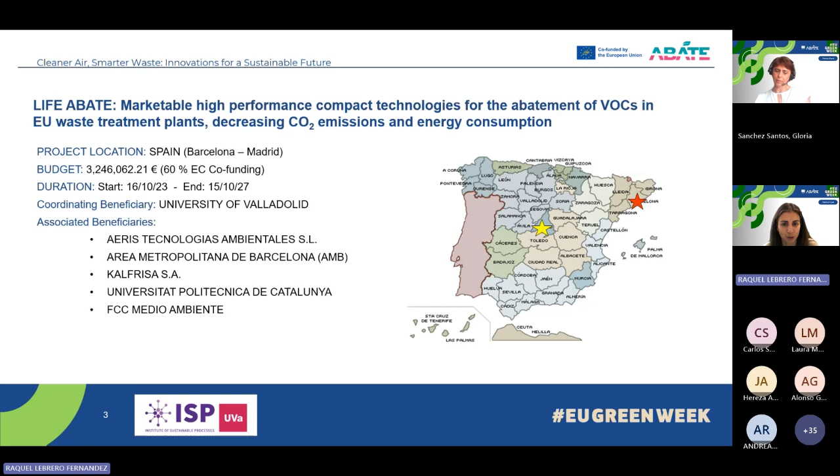But what was the main problematic or the main challenge that triggered the development of this project? Well, what we know is that nearly 700 waste treatment plants, or more specifically mechanical biological treatment plants that we have right now across Europe, are releasing over 4 million tons of volatile organic compounds annually.

And these gaseous emissions are very tricky for treatment because they have very special or distinctive characteristics. They are characterized by really high airflow rates and trace level concentrations of a broad spectrum of VOC families. So basically, we have huge volumes of air streams with a huge number of volatile organic compounds with different characteristics and at very low concentrations.

So the treatment of these emissions has always been very challenging. Right now, current technologies that are used in MBT plants for the elimination, for the removal of these VOCs, are either physicochemical, such as, for example, thermal oxidizers, or they can be also biological, such as biofilters.

But these technologies, these solutions are usually high cost, they consume a lot of energy, and they have also a high carbon dioxide footprint. And if we look at the biological technologies, at the biofilters, they usually are challenged because they require a lot of space. They have a high footprint.

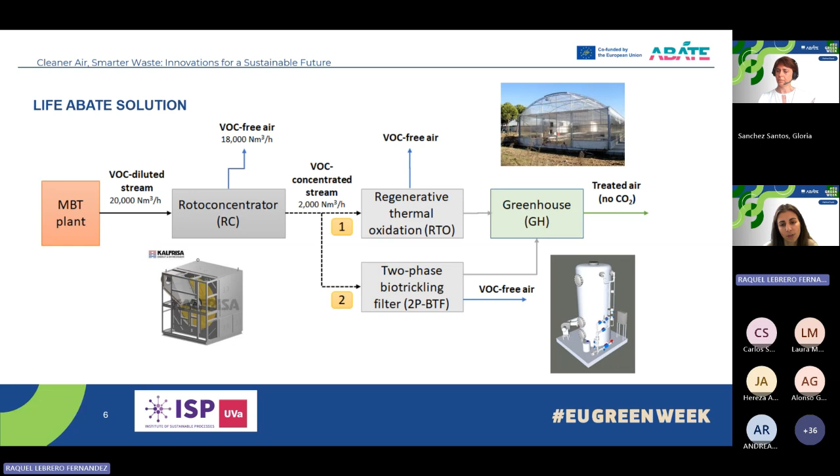As I said, we have finalized all the detail engineering. We are finalizing also the construction of the demo plant that will be started in September in Ecoparc 3. But I want to show you also some preliminary results that I think are very interesting, that were used as the baseline for the design of the technology of this demo plant. We performed some sampling campaigns for the identification and quantification of volatile organic compounds in the Ecoparc 3, in this MBT treatment plant.

These two sampling campaigns use different sampling methods and analytical methods, but I just want to focus on the main results. As you can see here from the first campaign, what we saw is that isobutane, butane, and ethanol were the main VOCs contributing to the concentration in the indoor air of Ecoparc 3. And the ones that contributed most to the odor were D-limonene and ethanol.

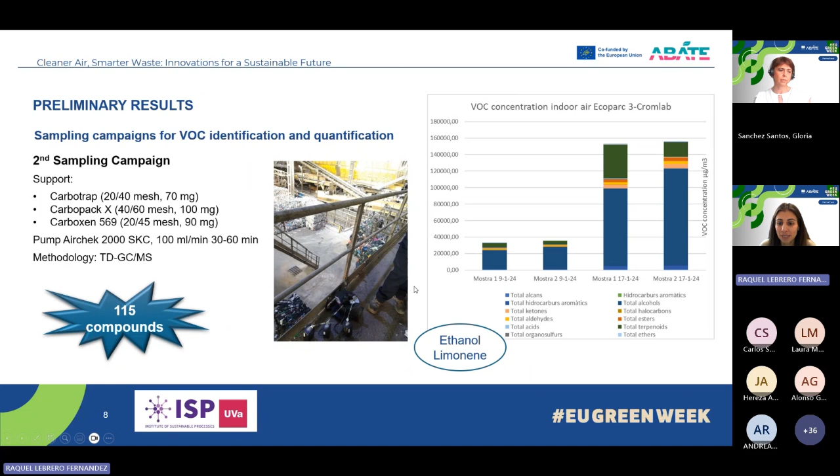And in the second sampling campaign, where we used a more complex support for sampling and analytical TD-GCMS for identification and quantification, we could identify 115 compounds. So just to take into account that we are targeting the removal of most of them in our solution. The ones that had the highest concentration were ethanol and limonene. And here you have the ones that contributed the most to odor, which were acetaldehyde, ethyl butyrate, and butanoic acid.

So of course, this poses a big challenge for the technology, for the project, because as I said, we detected a lot of different compounds from many different families, and we had to prioritize. So our prioritization was based first on removing those VOCs with greatest health risk, those that were most abundant in our samplings, those compounds whose concentration exceeded the odor threshold, and then we had to also prioritize different compounds over others.

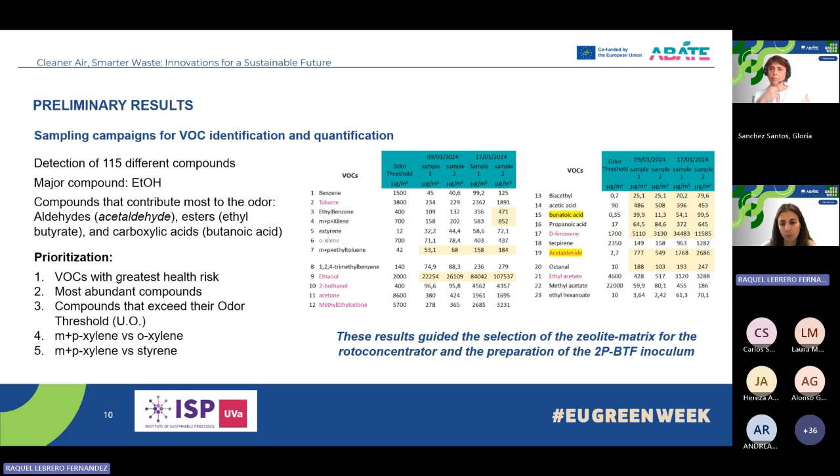And this selection of these results were the ones that guided the selection of the zeolite matrix for the rotoconcentrator. And also, we use these results for the preparation of the inoculum of the two-phase biotrickling filter.

And for about 200 days, the system was operating with removal efficiencies over 90% in the biotrickling filter for all the compounds. So we had very good results at the laboratory scale, and these ones we're expecting to translate into this demo scale.

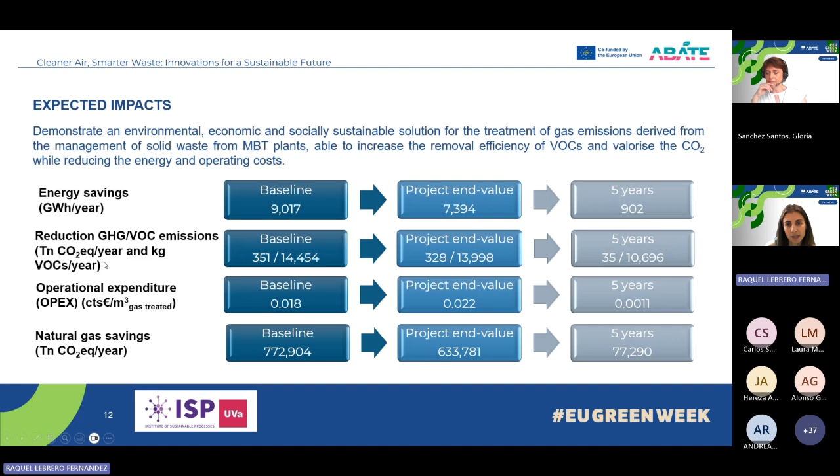Well, here you have the expected impacts. These were some numbers that we did at the beginning of the project, but we have our partner from Polytechnic University of Catalonia that will present these impacts later on. So you will hear more about the energy savings, reduction of greenhouse gases, VOCs, OPEX, and natural gas savings. So this will be further treated later.

And just to end the presentation, our project is clearly aligned with the goals of the European Green Deal 2030 Climate and Energy Framework, the European Union's carbon neutrality, and other European Union directives for minimizing volatile organic compounds emissions and other events from MBT plants. And also we are expecting to include our technology as the best available technologies in the BREF document for waste treatment, and hopefully to consider it in the development of European Union policies.

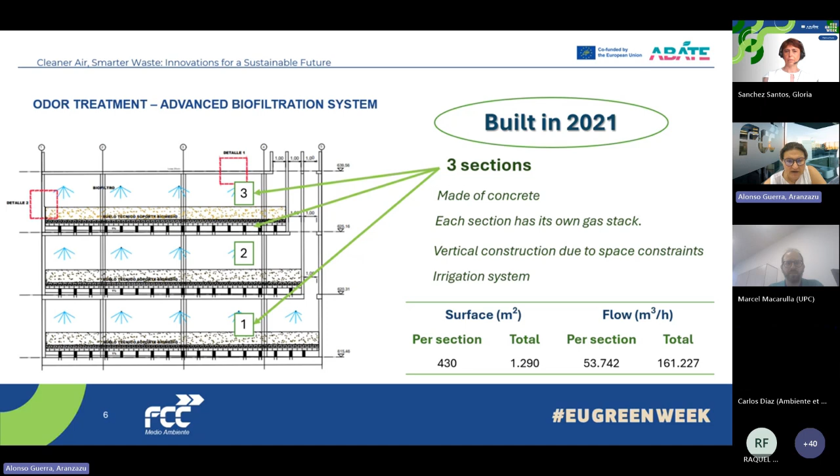The stream of air is extracted from the most problematic areas of the plant, and first is humidified in a scrubber to ensure that the air arrives in optimal humidity conditions and free of dust or particles that could inhibit the biological reaction inside the biofilter.

The scrubber is a tank filled with a plastic material where the polluted air is countercurrently washed with water. We use water that is the permeate reuse from the reverse osmosis in the leachate treatment plant. Once pre-humidified, this air is injected into the biofilter and distributed in the 3 sections.

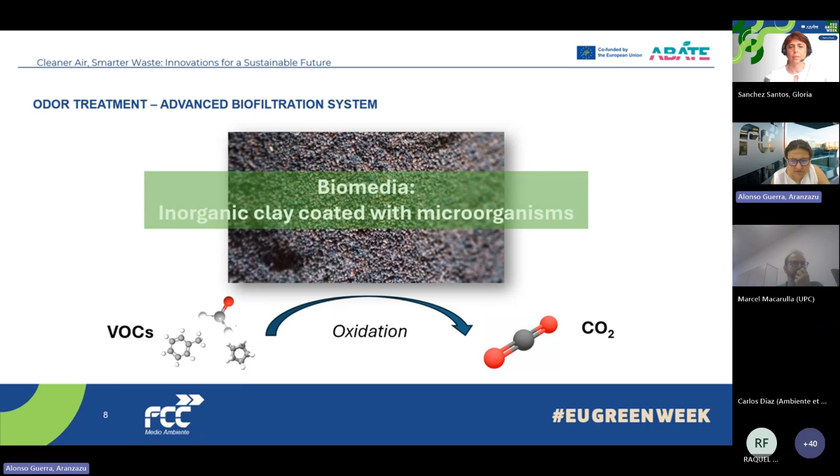The biomedia is an inorganic clay covered with specific microorganisms that oxidize the gases present in this polluted air, transforming them into CO2. This biomedia is the key for this advanced and innovative deodorization technology. And this is the biofilter that we use now in the plant.

One of these is the LIFE ABATE project, which aims to reduce VOC and other emissions, and also reduce the operating cost of the deodorization system, as Raquel has explained very well. In addition, it will transfer this CO2 produced to a greenhouse for agriculture use.

The ABATE solution to be installed at a biomethanization plant in Las Dehesas will treat a flow rate of 20,000 normal cubic meters per hour at 35 degrees, loaded with VOCs. First, the stream will be passed through a particle filter.

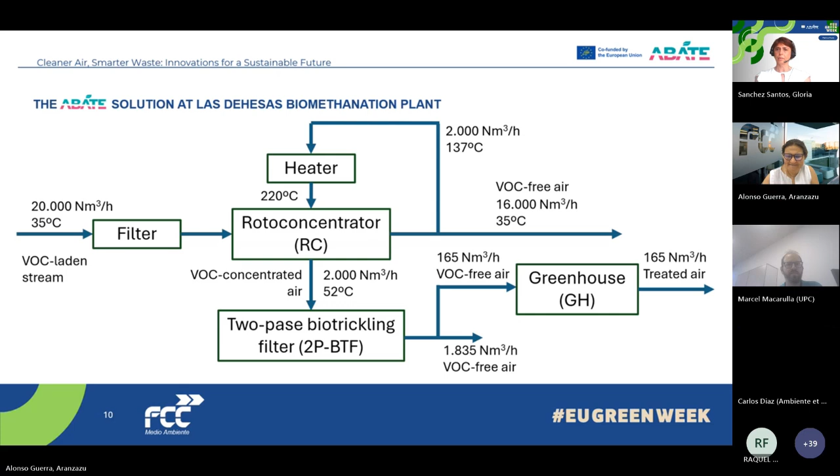The rotary concentrator is the first equipment of great importance in this process, and is where the concentration of the VOC stream will take place. The most important advantage of concentrating this stream before cleaning is reduction in the volume of air to be treated, decreasing the size of this equipment, and therefore the investment cost and energy consumption of the treatment is also reduced.

Also, the system is more compact and saves space. The equipment is easier for installation in the plant and dismantling if it was necessary to move to another place. Greater system efficiency is expected, as concentrating the VOC stream allows the system to operate closer to its optimal load range, and this will increase the removal efficiency, we hope.

The concentrated air will be treated in the biotrickling, a biological VOC treatment system. Here, the polluted air passes through a bed of inorganic material irrigated with a solution rich in nutrients and microorganisms. When the airstream passes through the bed, the pollutants dissolve in the liquid recirculated inside it. The microorganisms present in the biomedia oxidize the contaminants into non-toxic compounds such as CO2.

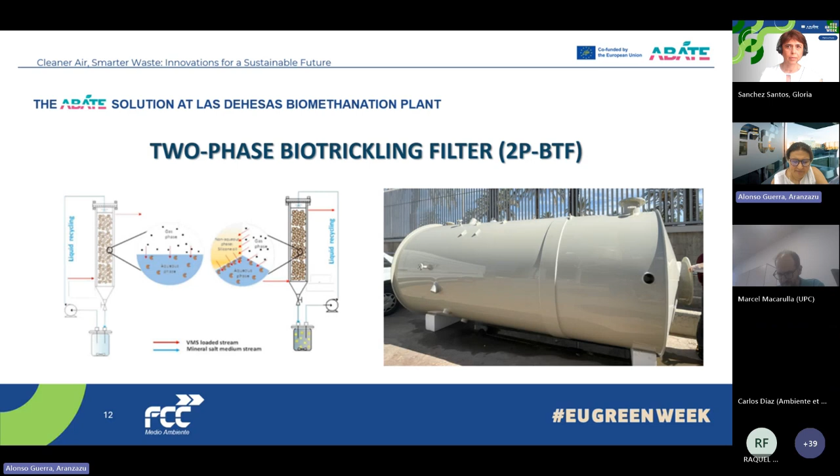But the ABATE solution has several strengths worth highlighting. Operating parameters, pH, nutrients, contaminants, and temperature are better controlled in biotrickling, we hope. Biotrickling supports higher loads of contaminants, such as VOC and acid gases. It is more stable, does not dry out or clog easily, and performs very well when load variability is high.

After biotrickling, the airstream rich in CO2 will be used in the greenhouse agriculture, and this also reduces the concentration of greenhouse gas emissions to the atmosphere.

Current operation in our biofilter, Arantxa, one minute, sorry, okay, one minute, okay.

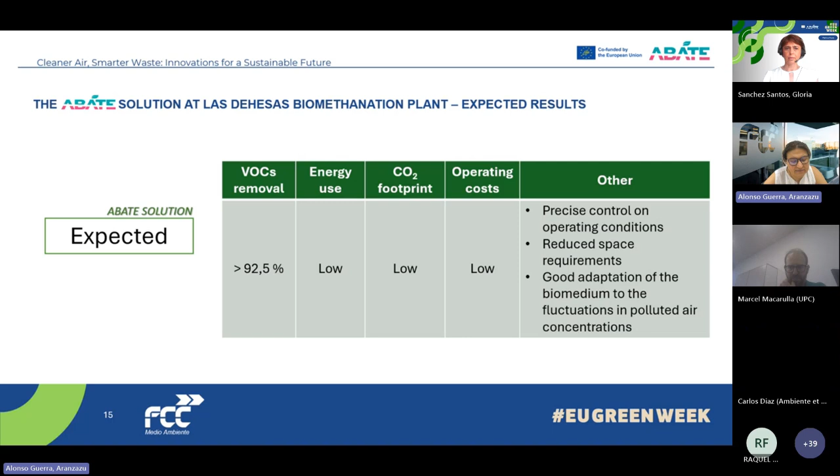What we expect in the ABATE solution is a similar VOC removal efficiency, around 92, an important reduction in energy consumption and carbon footprint, lower operating costs, and resolving some of the operational problems that we have now in the biofilter.

The preliminary LCA analysis suggests a high possibility of a reduction in energy consumption due to the rotary concentrator, although it considers the reduction in footprint in square meters, and an annual saving of around 87 in operating costs. Compared to the current equipment, it's a very significant difference, and a compact system requires less maintenance.

Now it is necessary to validate this technology and obtain experimental results when the prototype is put into operation in Madrid. The design of the equipment and the preliminary LCA analysis suggests that the ABATE solution at Las Dehesas biomethanization plant could be viable and competitive for replication in other mechanical and biological treatment plants for municipal solid waste. In summary, the solution proposed by ABATE offers big advantages for deodorization.

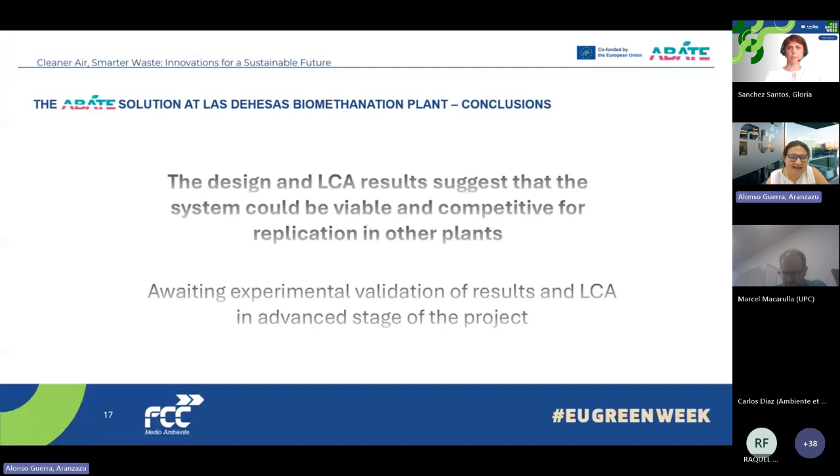One, reduced space occupation and lower footprint. Two, long lifespan of the packing material of the two-phase biotrickling filter compared to a conventional biofilter. Also significant energy savings, minimal operation costs, a totally automated system, good adaptation of the biomass to fluctuations in polluted gas concentration, and environmentally friendly technology.

Thank you very much for your attention. I'm sure this will be a great project, and we will obtain good results from this prototype. Thank you very much. Thank you, Arantxa.

Now we continue inside the LIFE ABATE consortium with Marcel Macarulla. He is Associate Professor at the Polytechnic University of Catalonia, belonging to the Construction Research and Innovation Group named GRIC, expert in the integration of greenhouses with buildings of various typologies to investigate environmental assessment and circularity synergies, with a focus on energy optimization, indoor air comfort, and LCA modeling. He is head of RG Lab, a living lab that integrates a greenhouse into a building's ventilation system to explore real case indoor air modeling and energy efficiency.

Thank you, Gloria, for your introduction. Sorry for this small issue. As Gloria mentioned, I am Marcel Macarulla, and my presentation is Expected Impact of LIFE ABATE: Reductions of Emissions, Energy Efficiency, and Cost Savings. This is the content of my presentation.

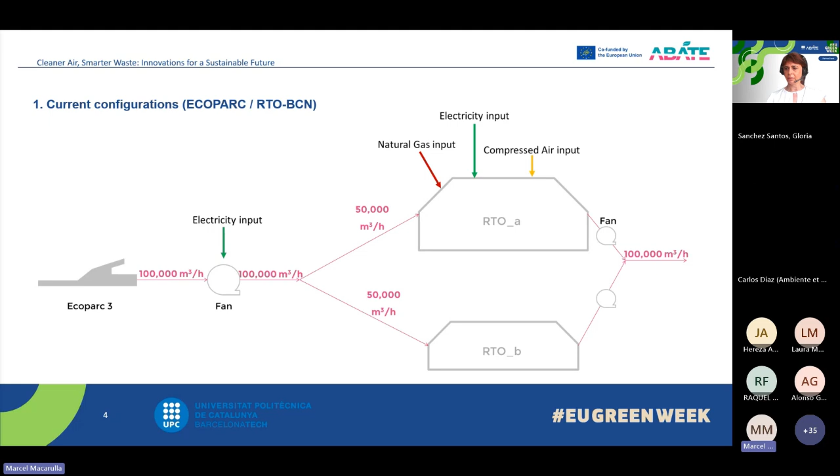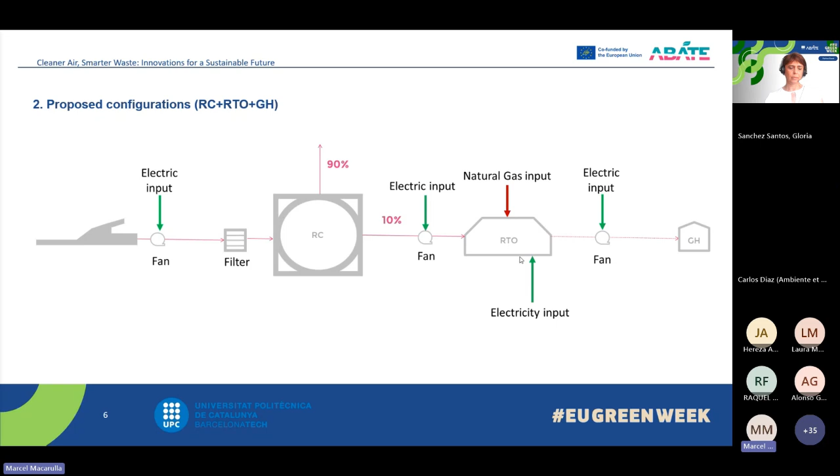Which are the solutions that we propose? The idea here is to take the air from our installations, put it into a roto concentration just to treat less air than we are doing right now, and then treat it with a regenerative thermal oxidation, and then put it in the greenhouse.

This is our system, a pilot plant. The idea is we will treat 20,000, of which 2,000 will go through the RTO and then to the greenhouse, and then we have 18,000 going to the exterior. To avoid emissions, we will put this again just to be sure that the roto concentration is gathering or catching all the pollutants. We are putting this air inside our installations just to be sure that the pollutants are completely removed.

In the case of the biofilter, this is the scenario - the idea is the same. With the roto concentration we treat less air, and then with electricity, water, and silicone oil we treat the air and put it inside the greenhouse. Here the idea is to recover the waste heat in winter and to recover the CO2.

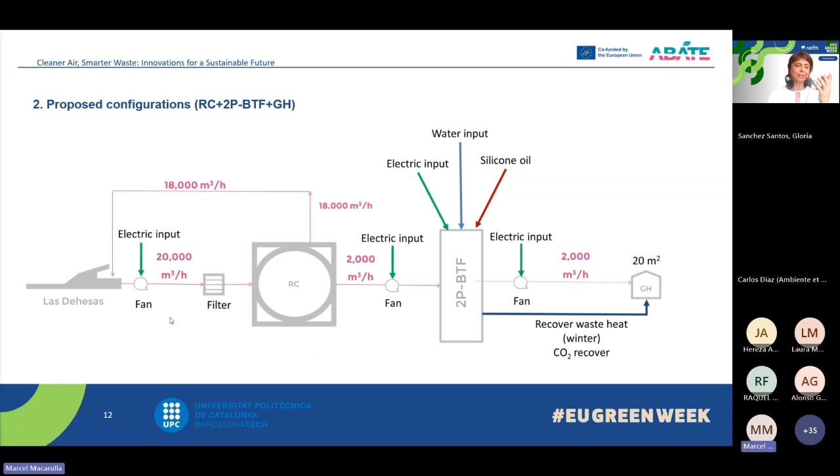Again, what we are doing here is making sure we are not putting volatile components in the air. We are reusing the air that goes outside the roto concentration, putting it inside the facility again to be sure we are not releasing pollutants to the external part of the building.

Then the LCA modeling - these are the configurations that we analyzed: the Ecoparc plus the RTO, Las Dehesas with the biofilter, and then the roto concentration, the RTO and the greenhouse, and the roto concentration with the two-phase biotrickling filter and the greenhouse.

Here, what you have to notice is that in the Ecoparc, we didn't put the greenhouse, and in Las Dehesas we didn't put the greenhouse either. As you will see, the results are a little bit strange, but the point is that this is a pilot, and probably we should plan which is a typical greenhouse that we can reuse.

Okay, then I will explain how we did this extrapolation. We focused on the operational phase of the technologies, mainly on the energy consumption and the rest. We considered a continuous operation of 24 hours a day and an expected lifetime of 25 years. We declared the functional unit as 1 normalized cubic meter per hour of treated gas.

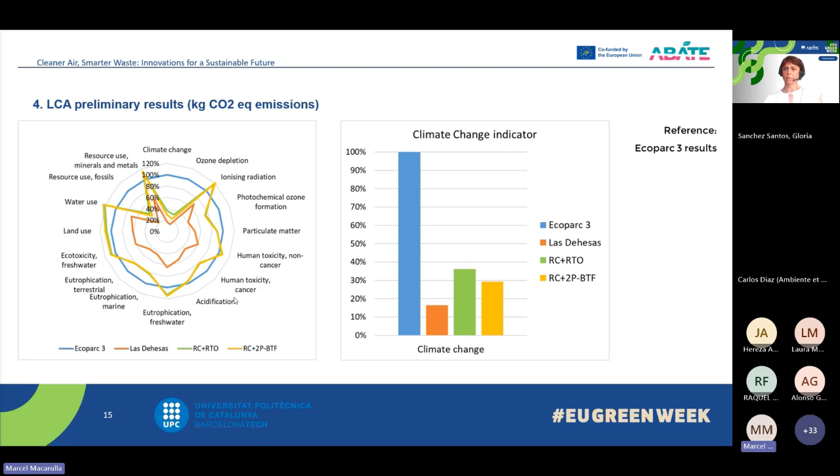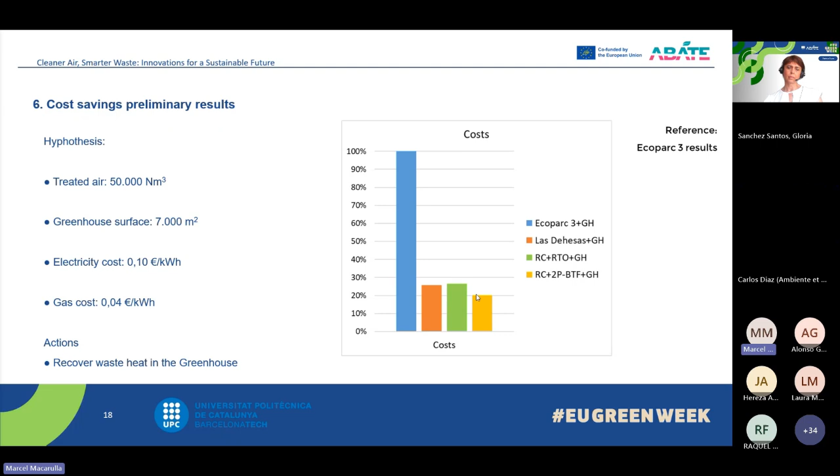Then, if we talk about the preliminary conclusions, first of all we have to say that the estimations are still preliminary, and the results can vary along the project.

You have to consider that the estimations of Las Dehesas and ecopark were very easy to do because we have all the information from our colleagues. All of them provided us all the operational data we need, and there is no discussion about this data. However, for the operational phase of our pilot plant, we have small equipment and the problem of scalability, and this is penalizing our estimations, but we have to find a way to compensate that.

Regarding this stage, we only considered the operational phase because we don't know the impact of building a new regenerative thermal oxidation plant or a new biofilter. But this is something we have to do in the next steps of the project.

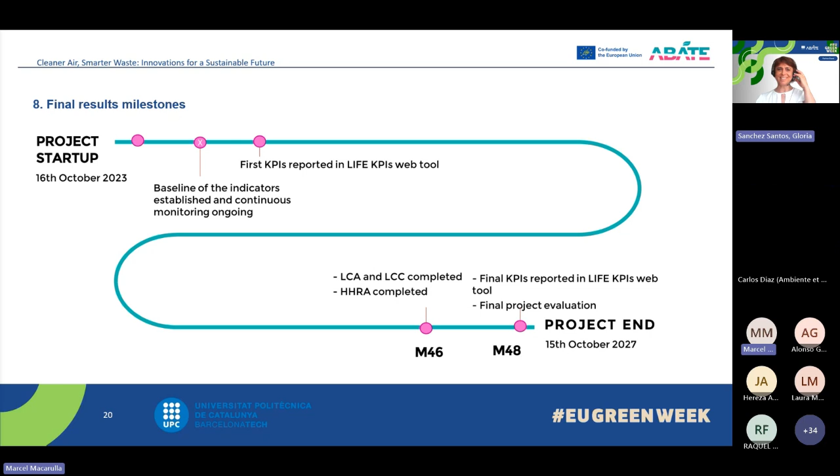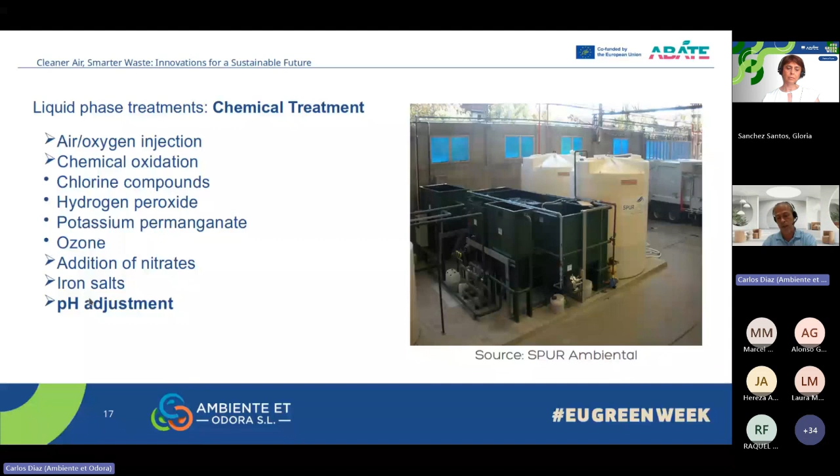And the pH adjustment. Depending on the pH in a liquid, you may have a higher or lower emission of hydrogen sulfide, which is one of the typical indicators, not the only one.

Then in liquid phase treatments, you have the biological treatment, and there are three approaches. The first one is the recirculation of activated sludge. So you are in a wastewater treatment plant, and then you can recirculate the activated sludge and put it at the head of the system, at the beginning of the system. Because there are nitrified effluents, remember we use nitrates there, those will help to improve your odor emission in your plant, in your wastewater treatment plant, in case you have it. Another approach is the oxidized ammonium recirculation, in which you get oxidized ammonium from, for example, a centrate nitrification, or from the nitrification part, and then you introduce it in the inlet. So this is a very cheap way to reduce your odor emission if you have a wastewater treatment plant with problems of odor complaints.

And it's not here, but sometimes some people use enzymes for biological treatment. I didn't include it here because publications I have found around, they are not that positive.

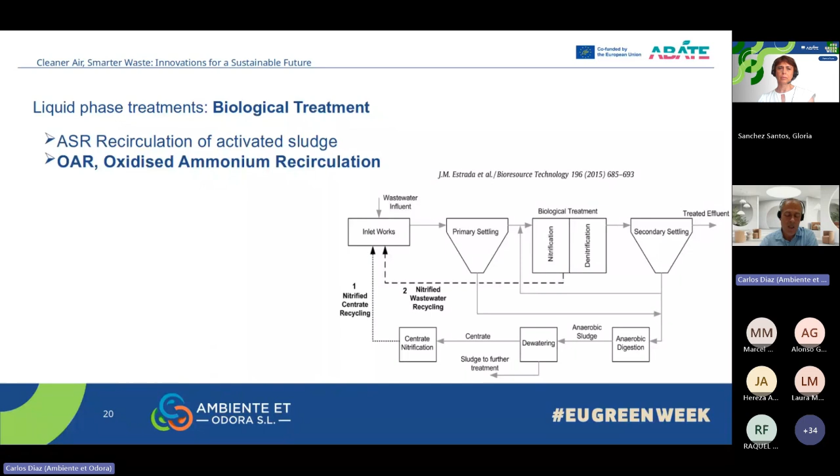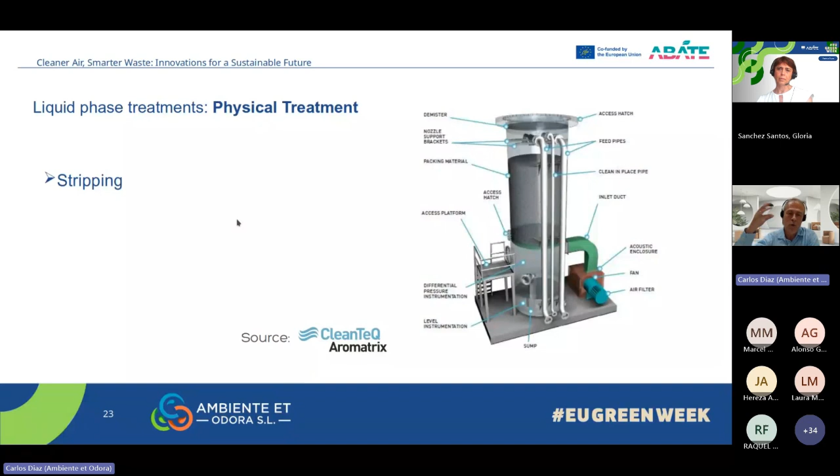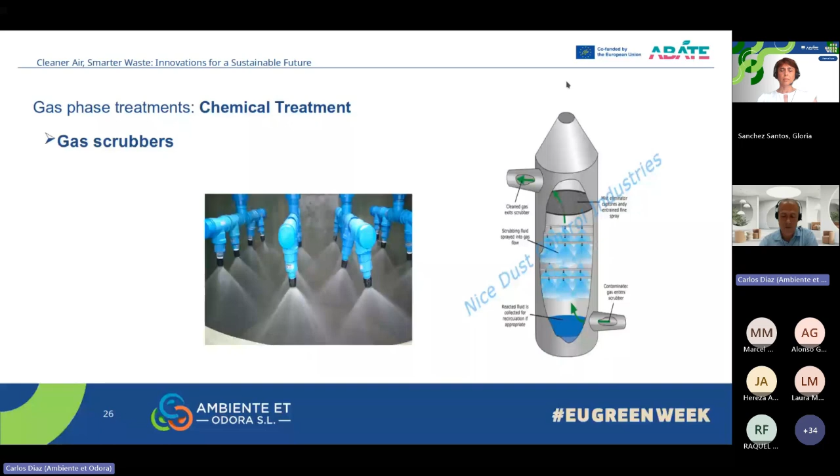Then for biological treatment, we have heard some technology here before, so I will not go longer here. So we have the biofilters, open and closed.

But we normally prefer closed systems, biotrickling filters, which has been explained before, and bioscrubbers, which are other technologies. These biological treatments look the same, but they are used for pump stations or underground places where you have wastewater collectors, and you need small technologies.

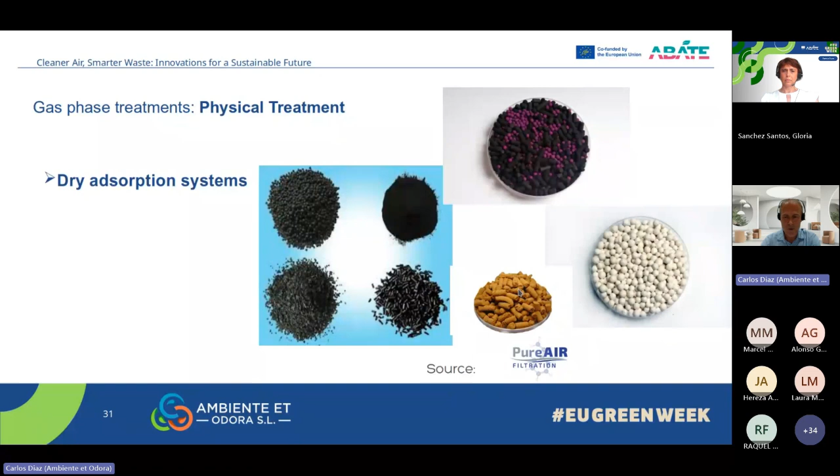And another one, I don't remember. And this is iron salts. They are made for biogas systems. So here you have one typical dry adsorption system with activated carbon.

Another physical treatment is thermal oxidation, which we have heard about before. So you have direct oxidation, where your flame directly oxidizes the volatile organic compounds at temperatures over 700 degrees, and they get oxidized to CO2 and water.

Then you have the recuperative type. This is a recuperative in which there is a heat exchange that you can get this heat from, and you can produce water steam if you want.

Then you have the regenerative, which is this one, in which you use the heat from one chamber to heat up the other chamber, and for that you use a filling with ceramic tiles.

And then you have the catalytic, in which you use a catalyzer to oxidize those volatile organic compounds, but at lower temperatures. This is the good thing about catalytic oxidizers: you spend less money using these, but they are more expensive than the other two. And flares.

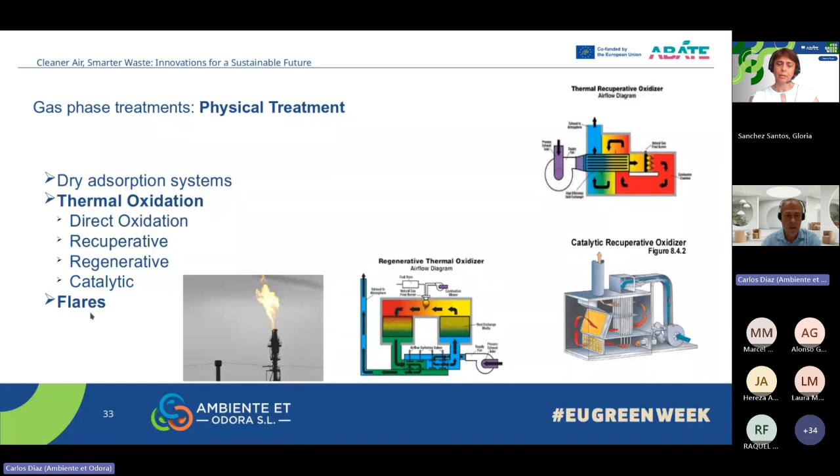And I will speak a little bit about rotoconcentrators. There have been some talks about this, but I had to talk because I'm talking about odor control. Rotoconcentrators are much used when you have industries with a high concentration of volatile organic compounds, like paint or refineries or things like this.

It's just a disk in which the VOCs get adsorbed with the zeolite, and this disk is spinning. When they get adsorbed, they get to a section in which they are heated up with a heater, and those compounds are desorbed. Once desorbed, the zeolite is clean again, and then it goes to a cooling phase, where it gets cooled, and the system starts again.

So I included this picture from one of the partners of this consortium.

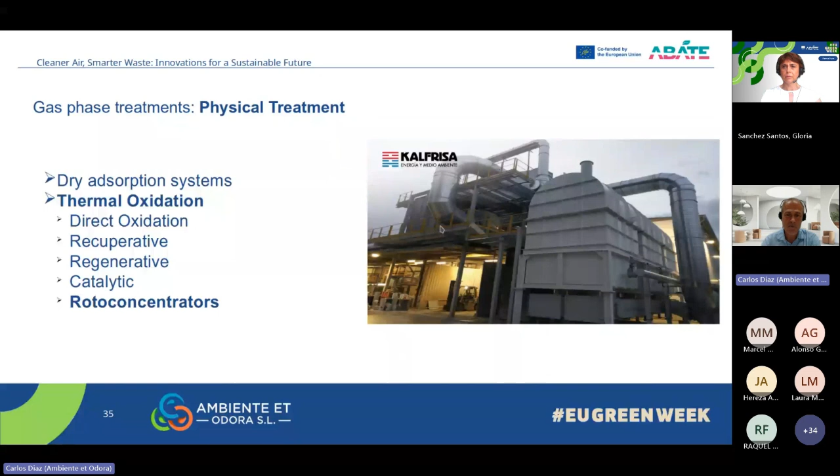Then you have ozone that you can use in the water phase, but you can also use ozone in the gas phase, which is typical. Cold plasma technologies - I didn't have time to put a picture here, but it's very much used. With cold plasma, it's just electricity that goes through here, and this electricity ionizes the gases and oxidizes them.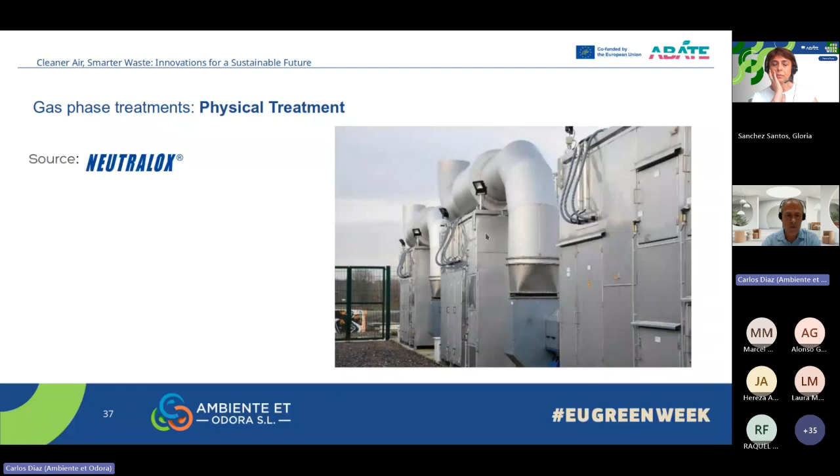And photocatalytic oxidation, which is this one, in which you use ultraviolet and sometimes a catalyzer like titanium dioxide, and you are able to achieve this with very low energy consumption, so they work very well. You get a good abatement efficiency rate. And this is another one - this is in Colombia, we were there a couple of months ago.

All right, so which method should we use? This is the typical graph we normally show. Sorry, I forgot to put the reference - I'll include it next time, or ask me if you want to know it. It's a very old publication, but we didn't like it because it didn't talk about odor. So we went and made our own table.

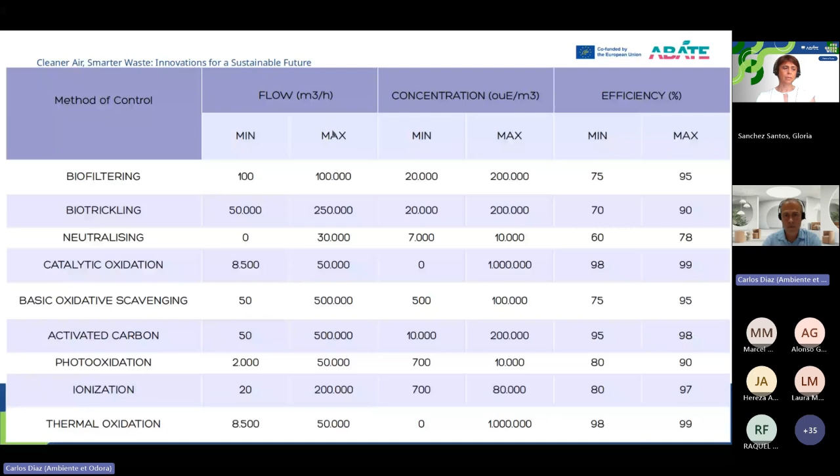You see here biofiltering, biotrickling with minimum and maximum flows, concentration minimum and maximum, efficiencies minimum and maximum. Where did we get this data? We got it from Vito - it's not in the reference here. From Vito, I see Ilse is around. We got different data related to flow, concentration, and efficiency rates.

And we produced this graph, which is different from the other one. The other one looks nicer, but for us, using data from Vito is more related to odor. So these are some of the technologies, not all I mentioned before, and here you have the efficiency rates, the maximum efficiency rates.

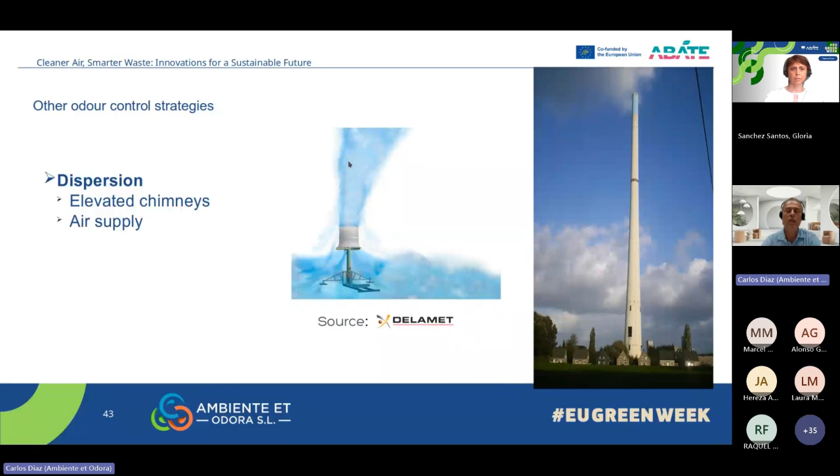There are other technologies to abate odor. First is elevated chimneys, where you disperse the odor. This is a tall chimney, a way to increase your plume. Then you can use covers - rigid, floating, different types. For solids, there are different ways of covering as well.

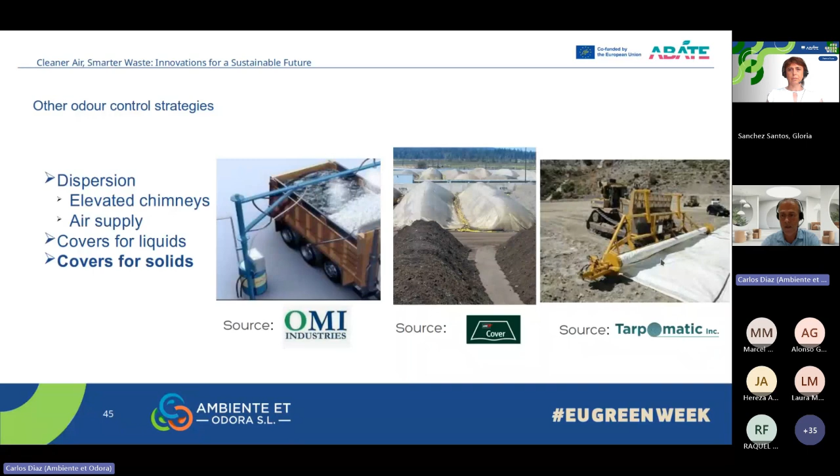You have covers for trucks and lorries, for composting plants, and for landfills. Then you have masking agents, neutralizers, odor encapsulators, etc. They explain very well how they work, and generally have lower costs, but they will not give numbers on odor abatement efficiency - they just say that they work. So do they work? Maybe they do, maybe they don't, who knows?

But there are other strategies, like using meteorological data to control odor emissions, diagnostic and prognostic odor dissipation models, instrumental odor monitoring systems, and many others - for example, using an odor management plan. But the best odor control strategy for any plant is working on the process.

If you want to know more, in Europe there are around 30 best reference documents related to different types of industries. For example, in farming, chemical industry, or waste, the word odor is mentioned a few times, with some mentions of odor abatement methods.

Thank you very much for your attention. If you have any doubt, I'll be waiting for your questions at the end of the session. Thank you very much.

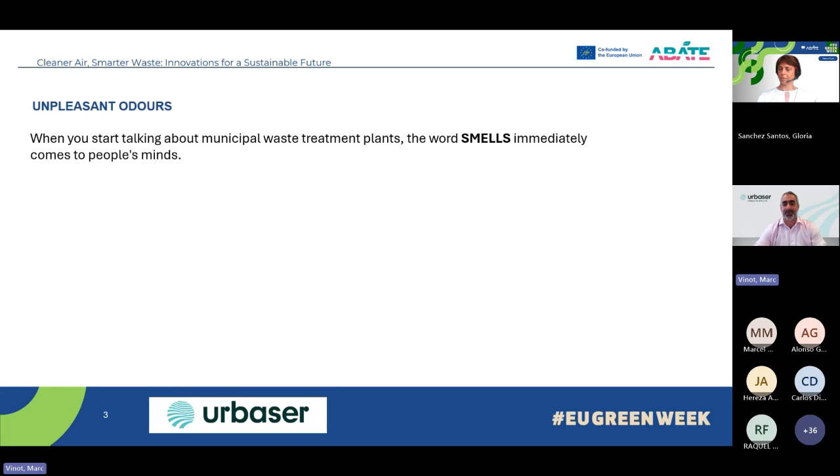Odor is a sensation, as you all know - the stimulation of sensory cells due to gas phase chemical compounds, usually found in very small quantity below the threshold of analytical detection, but producing a response in our olfactory bulb, giving us this sensation of odors.

The main odorant compounds, classified by main groups: sulfur compounds - H2S, mercaptans, thiols, sulfides, polysulfides; nitrogen compounds - ammonia and amines; aldehydes, ketones, organic acids, terpenes, alcohols, aromatics, aliphatics. There's more, but these are the main ones we get when we speak about odor compounds.

In waste treatment facilities, the main odor sources are the nitrogen compounds originating from the decomposition of nitrogen compounds present in the waste - we get ammonia, the urine smell, and amines, a fishy smell. The sulfur compounds come from the anaerobic decomposition of the organic fraction: hydrogen sulfide, a rotten egg smell, methyl mercaptans, a rotten onion smell, dimethyl sulfide, a cabbage smell, and dimethyl disulfide, a milk degradation smell.

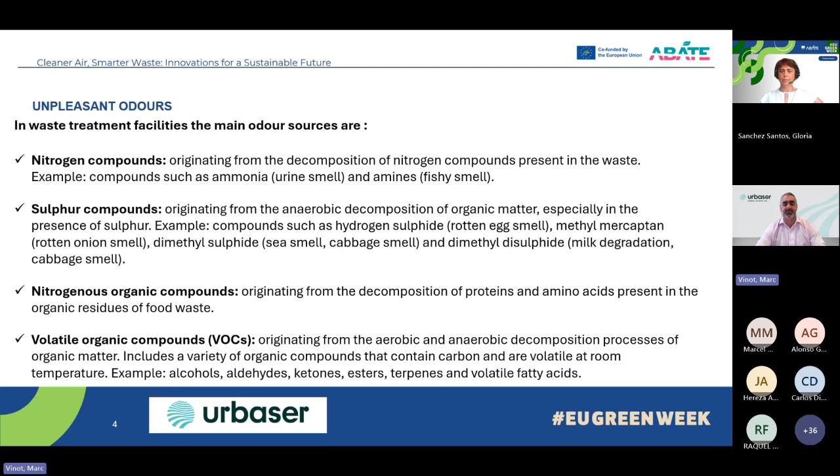We got nitrogenous organic compounds originating during the decomposition of proteins and amino acids in organic residues or food waste, and VOCs. For example, in aerobic and anaerobic decomposition processes of organic material, we have very high production of VOCs, compounds that contain carbon and are volatile at room temperature. So we got alcohols, aldehydes, ketones, esters, terpenes, and volatile fatty acids.

Now, if we focus on a municipal waste treatment plant, we have some areas where we have higher generation of odors. The first building or unit where we get this generation of odors is the reception and storage pit, because when we get waste, especially waste with high content of biodegradable material, it's prone to decomposition and odor generation.

The pit can have around 2 to 3 days capacity of storage, so the material stays in this pit for a lot of time. Depending on the country, the frequency of collection of waste from the house is quite different. For example, for bio-waste in Essex, it's nearly once a week. So when the waste arrives at the facility, it has already spent one week in a container.

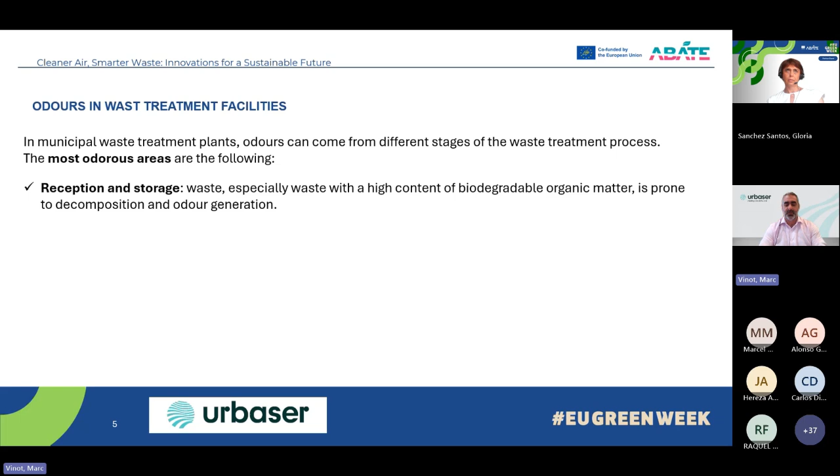Depending on these two factors, we can have a very high emission of VOCs and other compounds. Afterwards, we get the pretreatment and initial sorting of waste - the shredding and circulation of waste through the facility to segregate materials - which also releases gases and particles that generate odors. After that we have the biological treatment package, to process composting and anaerobic digestion of the organic fraction of the waste, which also generates volatile organic compounds and other odoriferous compounds. So these are the main units where we get generation of these compounds.

If we focus on VOCs, there is a very close relationship between odors and VOCs - we all know this. These diverse VOCs are a mixture of chemicals that can range in odor from sweet to rancid, and these compounds are released during the decomposition of organic material, as I said before.

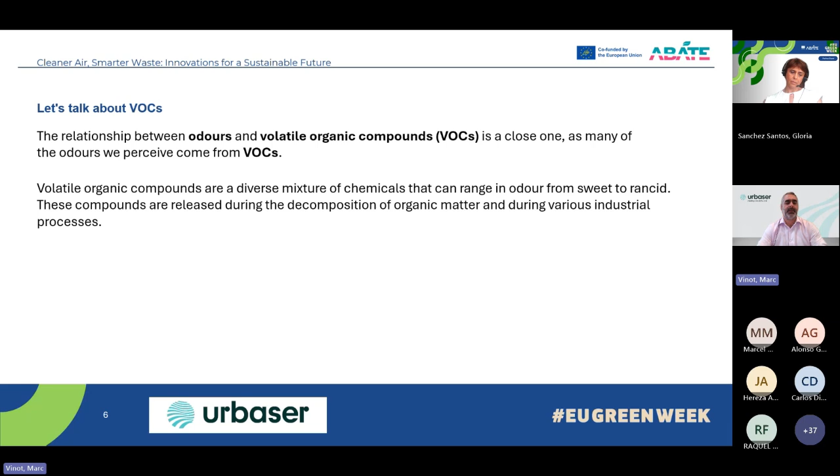In waste treatment facilities, VOCs are released by the anaerobic decomposition of organic waste without oxygen - anaerobic digestion, such as in landfills and fermentation in digesters, putrefaction processes, and the evaporation of solvents and chemicals in industrial or domestic waste. Thermal processes, when we get inefficient incineration, can also produce very high concentrations of VOCs at the output. And composting processes, especially if not well controlled, with lack of oxygen or excess moisture, etc. Even if you are controlling quite well in a composting process, there is always, in a composting tunnel, some area or zone with a lack of oxygen, so some points of anaerobic decomposition occur a lot.

We get some examples of common VOCs in municipal waste - this is very general: methane, which is odorless, and butyric acid, propionic acid, aldehydes, and terpenes.

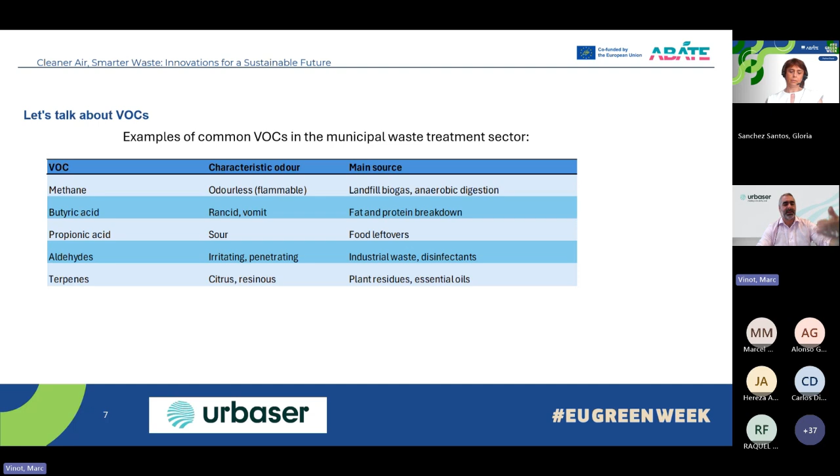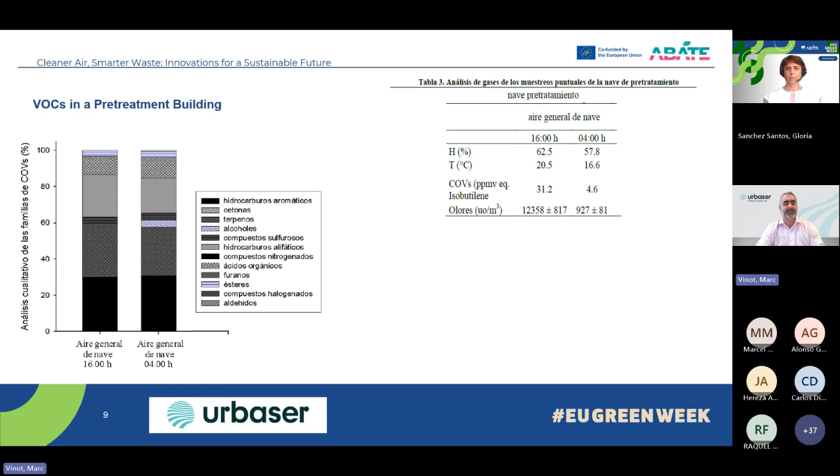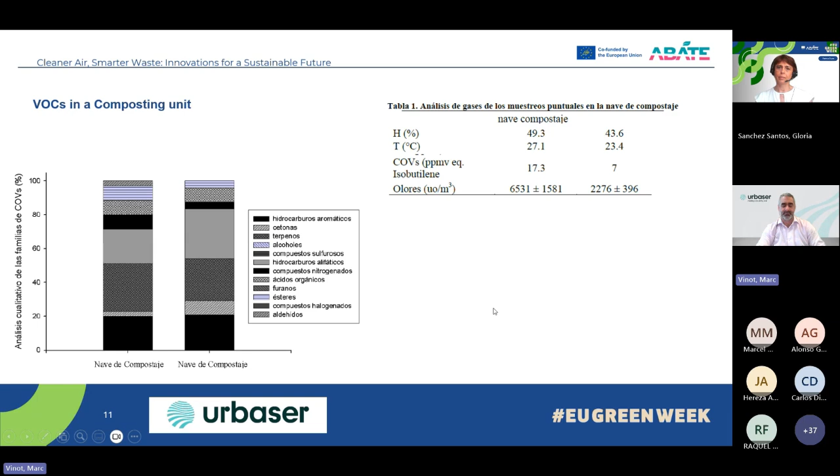If we go to a composting unit, so here we are in a composting building. We got VOCs around 17 to 7, depending on the moment of the day, and between 6 to 2,000 odor units. It occurs the same in terms of the families of VOCs. We are with the same families, with some aldehydes at the end, esters and aldehydes in the composition of the VOCs.

As somebody before spoke about the limits, we have to comply with some limits in terms of emission, the total VOC. It's indicated in the decision of the EU, 2018/1147, the BAT.

If we go, there is a definition of VOC based on an article of the directive 2010/75, and in BAT 34, it explains the different technologies to reduce the emission of dust, organic compounds and odorous compounds, including H2S and NH3.

And in this same BAT, there is some associated emission level that have been mentioned before at the beginning of the webinar. For the total VOC, between 5 and 40 milligrams per normal cubic meter. Obviously 5 must be with a TO, that's clear. But the value of 40 is normally the limit that is asked to comply.

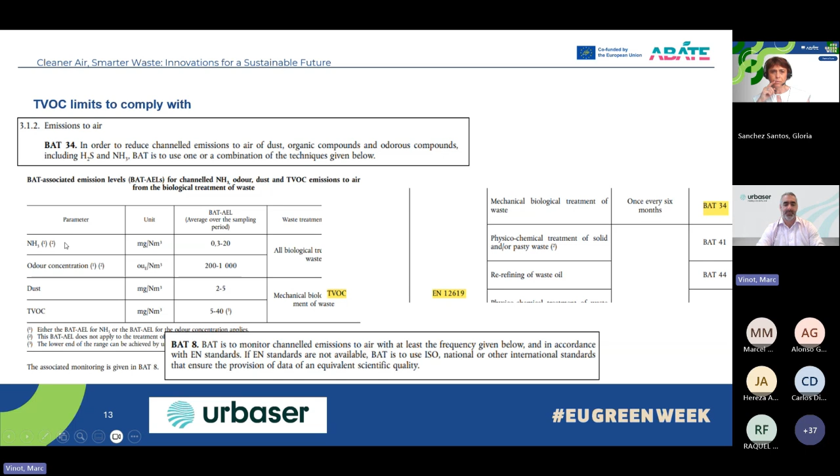And what happened at the end, we are speaking about odors, because as we see, one of the limitations is total VOC and odor concentration. We are speaking about odors. We have the dust, H2S and NH3. Well, there is no limit for H2S, but NH3 is in the BAT. But we are making the measurement of total VOC with flame ionization, so it means that methane, which is odorless, will be included in the measurement of total VOC.

As I said, in the reception area, the storage pits, or in the composting phase, and obviously in anaerobic digestion buildings, when we get dehydration of the digestate, the output material of a digester, at the end there is some methane. This means that when we get the limitation only on total VOC, it includes the methane. So actually there are some facilities where it's quite hard to comply with some values when they are not asking for 40 milligrams per cubic meter, but for 30 milligrams, and the value of methane is making it quite hard to comply with the limits when they ask for a very low limit.

If you have a biological treatment, or if you don't have a thermal oxidation — in some countries they are starting to speak about non-methanic VOC to avoid having methane, but there is not a measurement procedure existing yet.

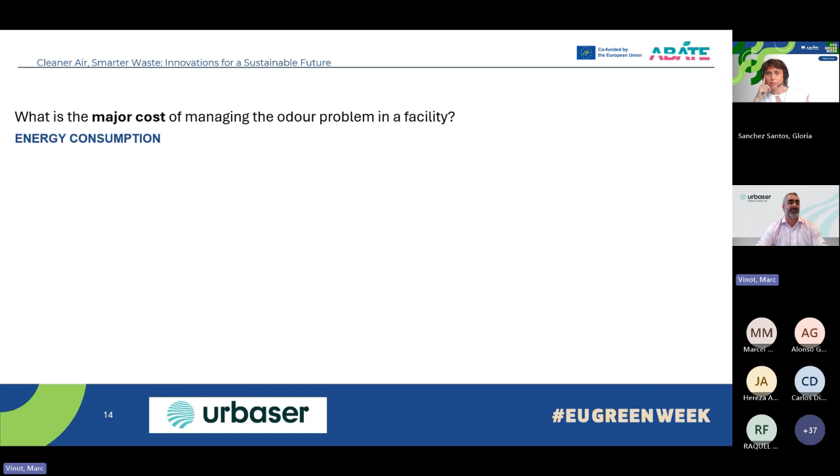The major cost of managing the odor problem in the facility is energy consumption. This is the challenge: how to ensure acceptable conditions in a municipal waste treatment building, increasing the air change per hour. It's a lot of money because it's a lot of flow. So this is an issue.

In the past, the grid of aspiration piping was more like you can see in this picture of a drawing, but it's a lot of pressure drops. In this picture, you can see this type of concept of ventilation, also some aspiration points in some equipment, but it's a lot of pressure drops.

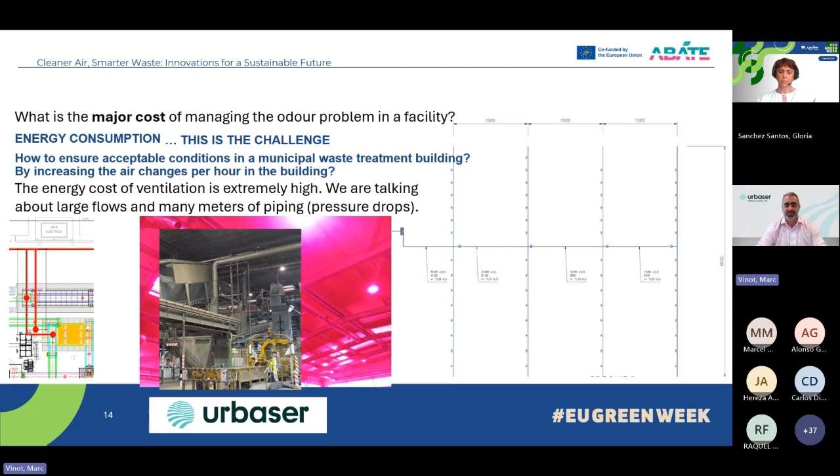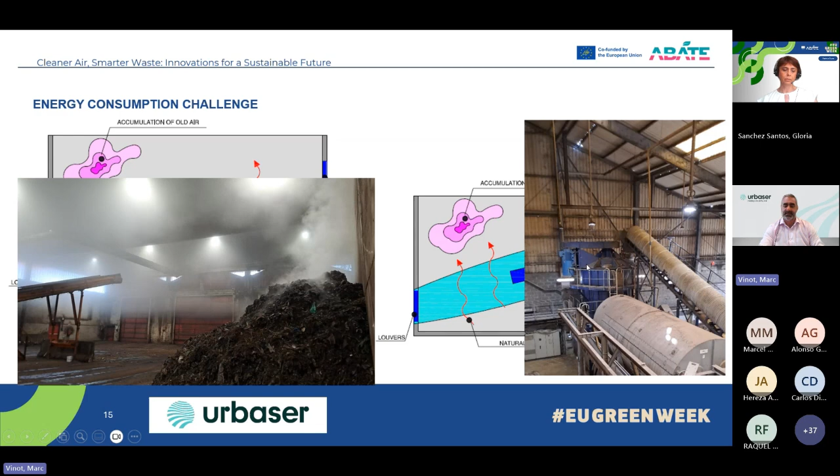So we have to think that we've got some ways through the process, the equipment. There is natural convection, and we have the air with the odorous compounds — there is a convection to the upper part of the building. So with the normal louvers, the usual concept, at the end we have stagnant air, which creates some problems, because with humidity you can have a rain effect in the buildings that can eventually create corrosion in the wall and roof of the building, and we can see it in the upper part over there above the pulper in a facility. So this is an important issue.

That shows that in Urbaser, one of our main objectives is decarbonization, and we're doing this. One of the ways is to reduce electrical consumption in all the ventilation systems.

So what I explained, we have the waste composting and the stagnant air, because the extraction can't have an impact on more than some, let's say 1 meter in the best case. So our concept is to create a dynamic zone using transfer fans to push the air near the grid.

Those fans are only 0.3 kilowatt each, and have an air supply range of about 20 to 30 meters, so they can push and transfer the contaminated air near the grid and near the extraction pipe to reduce the quantity and length of piping, and the pressure drops. This is the concept we developed with a company.

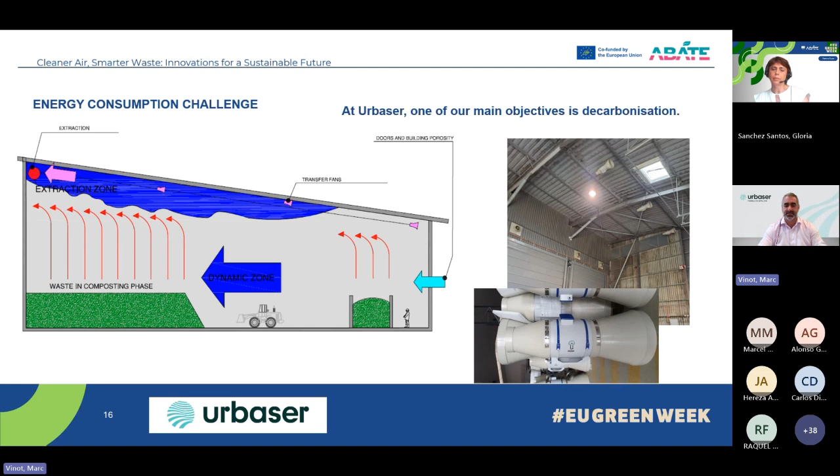To check this, we carried out a fluid dynamic CFD study to check the design. We mainly focus on temperature, velocity, and LMA, the local mean age - it means the air age, the time required for supply air to reach a point in space from a supply inlet.

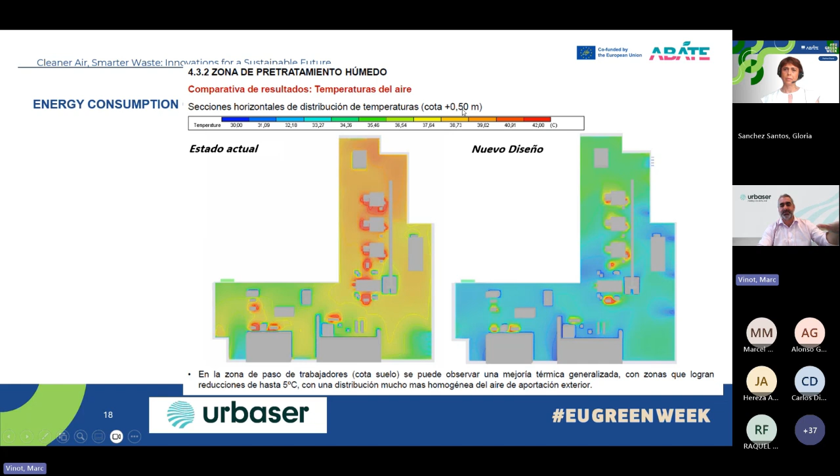On the left we have the actual, old state, and with the new design, we see the change in temperature. We were able to reduce the temperature in the building by up to 5 degrees. That's at 0.5 meter high, and at 6 meters we got the same impact, so the conditions are better in terms of temperature.

We move the air, and in terms of LMA, age of the air, we can reduce the retention time by more than 50%, avoiding stagnant air and some problems you can have in buildings.

Circular economy challenges and R&D - we got new developments in environmental technologies at the Alfonso Maíllo Urbaser Technological Innovation Center, and we work a lot on all the ventilation and air treatment issues.

And you can get my emails if you have some additional questions.

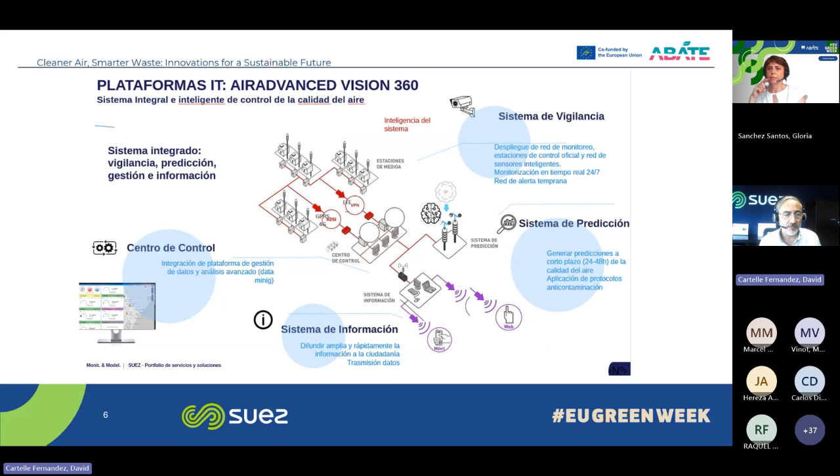Maybe one of the most powerful technological solutions is the AirAdvanced Vision 360 platform, where we integrate data from monitoring stations, monitoring systems and forecasting systems, all with the aim of offering a complete solution that includes historical data management to understand the past, early warning systems to manage the present, and forecasting systems to prevent future damages.

For the MidLOB project, we have deployed the AirAdvanced Vision 360 platform. MidLOB is an eco-innovative model for bio-waste management in the Seville metropolitan area. This solution has been developed through mainly three innovation projects, one of which is the deployment of the smart platform for monitoring air quality and others in the Complejo Ambiental de Copero.

The main objective of this project was, on the one hand, to deploy a network of air quality sensors around the composting plant as an early warning system, consisting of H2S, ammonia plus VOC detectors. On the other hand, the service consists of the deployment of equipment with electrochemical sensors in emission, in one of the outlets of the biofilter of the composting plant, provided with a sample conditioning system in order to measure the emissions.

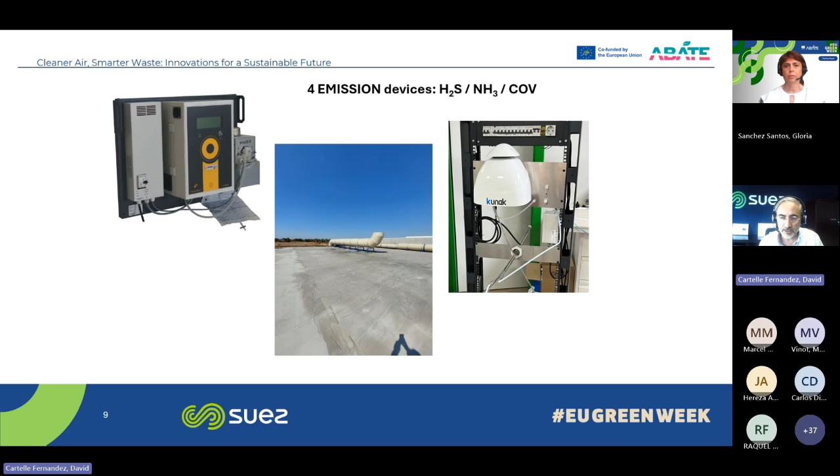At the same time, the platform also had to collect data from four other emission measurement devices, as well as other sensors in plants such as ammonia detectors, which are located inside the composting buildings.

So the AirAdvanced platform was deployed here, and it's important to note that one of its main features is the ability to customize and fit to the customer needs, and the fact that it is an agnostic platform. That means we can connect every kind of sensor to our platform. It has a modular structure, as you can see here, which we will see in the next slides.

The first module is the supervision module. It has a dashboard with a system of colored cards according to the air quality index, odor index, or emission limit values. These colors and thresholds are fully configurable by the user. On the right, you can see a map showing the different sensors with their location and the color associated with the corresponding index. The sensors are grouped in different networks, which means it is possible to differentiate between, for example, the early warning system, the emissions equipment, or the sensors inside the composting plant.

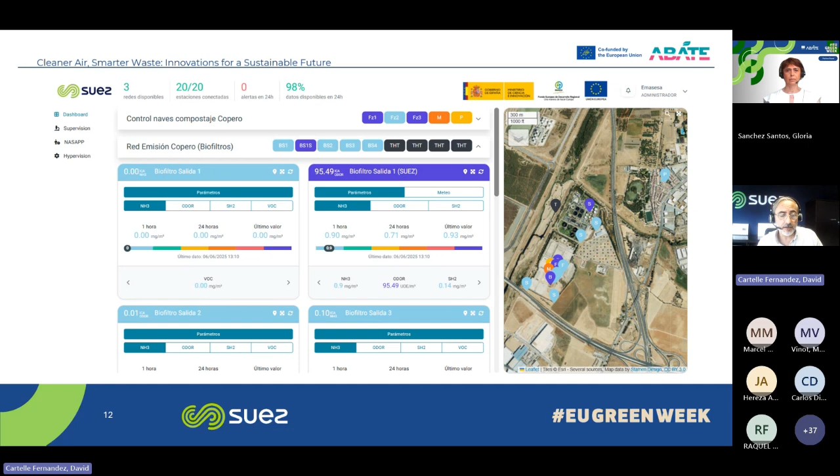By clicking on any of the networks, the different associated sensors are displayed, where we can see the latest data of the different parameters we are measuring. In addition, we can see in more detail the last 24 or 48 hours by means of interactive tables or graphs, where we can choose the different parameters we want to visualize.

The next module is the supervision module for the analysis of historical data, where we can choose the dates, seasons, or different types of representations. It is based on the OpenAir software.

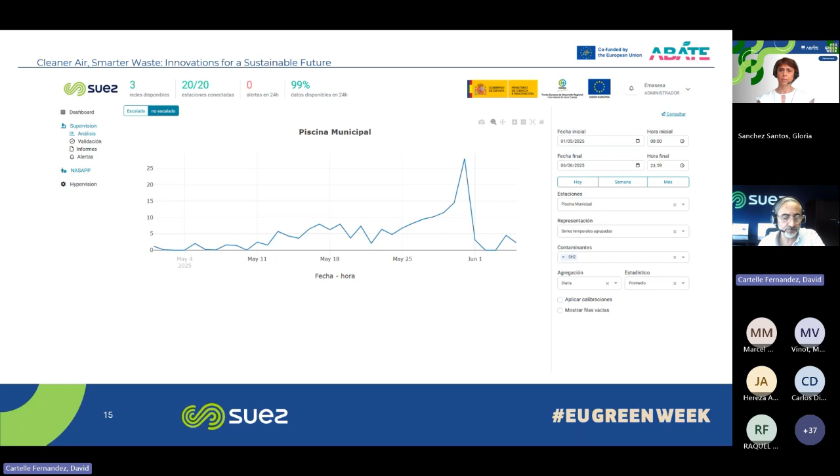An important part of the system is always the data validation, because we always need to validate the data in order to segregate the invalid data from the valid one. By means of the validation module, invalid data is flagged via a flag, which is a letter. That means the raw data, the original data, is always stored in our system.

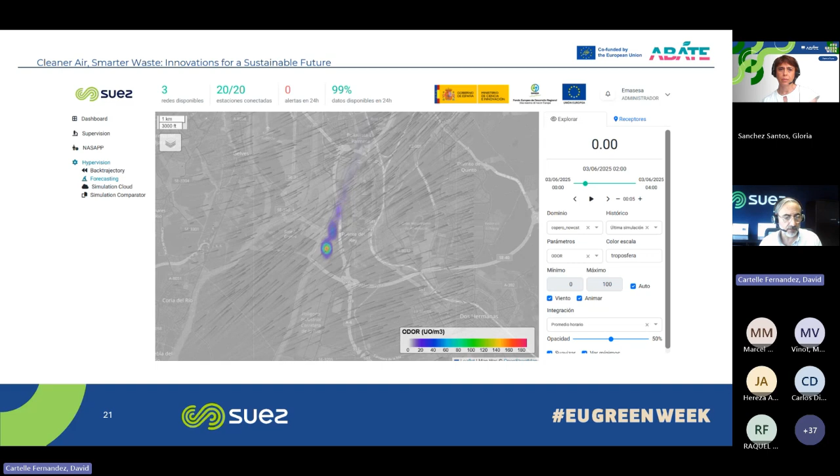And finally, what we have is a module for on-demand model run. In this way, the user can run his own modeling, introducing new sources or changing the emission rates of existing sources, and so on. So we can obtain our own results without any knowledge about models.

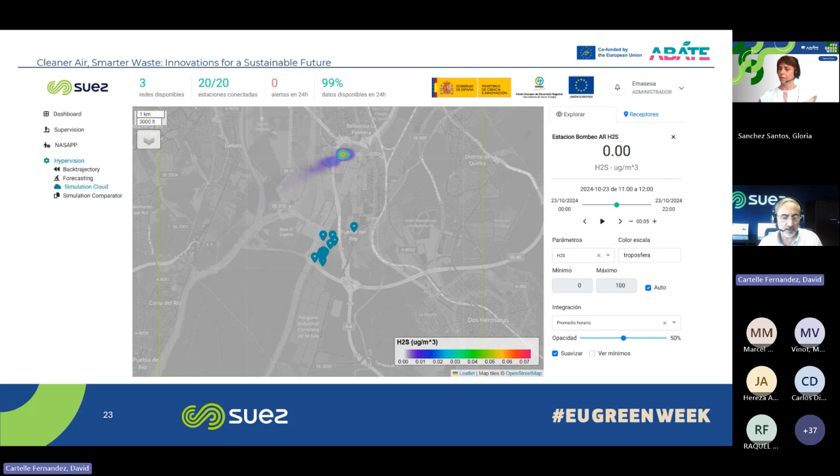This is just an example of one simulation done by the user for a new source, for example. In addition, the tool has a visualization system that allows us to compare different scenarios, different situations, acting as a digital twin.

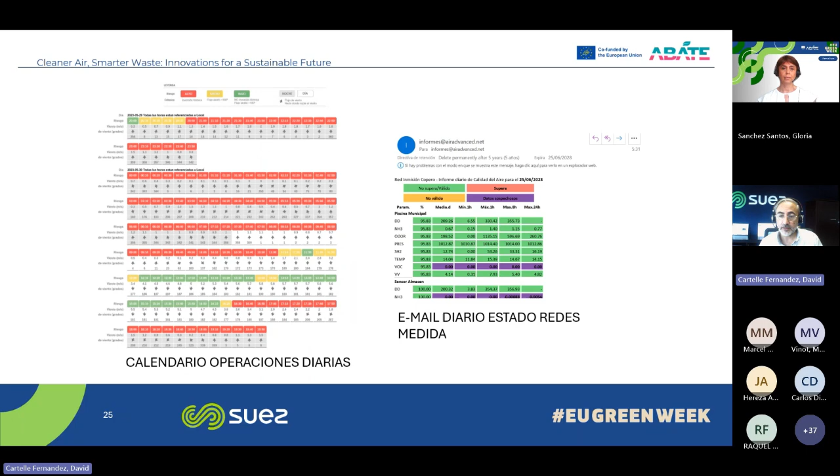And finally, this is the end, I promise. Air Advanced sends a daily forecast report by email with a risk calendar. This calendar is strictly based on meteorological conditions, such as the existence of thermic inversions and wind direction, and so on. That means we can advise or warn the user about maybe any complex situation.

Just to say that, as an innovative component, as it's in experimental phase, the system has been developed to calculate odor concentration from the concentrations obtained by the air quality and emission sensors. These calculations are based on the Weber-Fechner law, in which the odor concentration is initially calculated based on the results of H2S mainly and ammonia.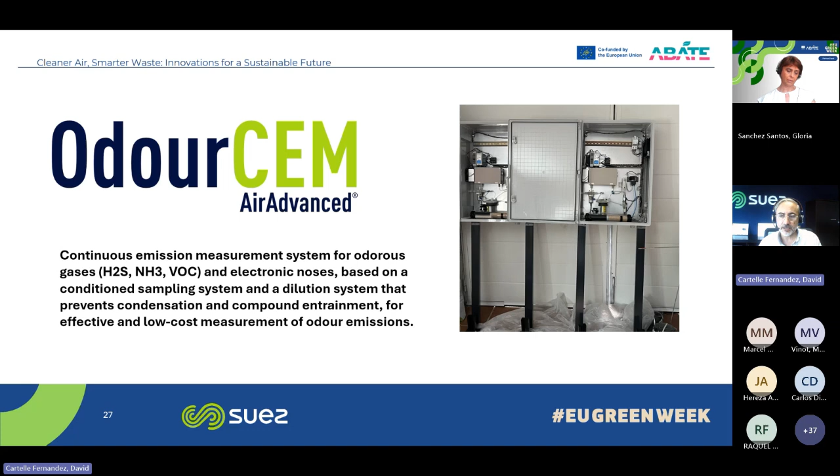To finish, just to say that we are developing our own continuous emission system for measurements, mainly for H2S, ammonia, and VOC, and trying to couple an electronic nose. This is based on a new conditioned sampling approach, in order to have the least losses in the system. Okay, so that's all.

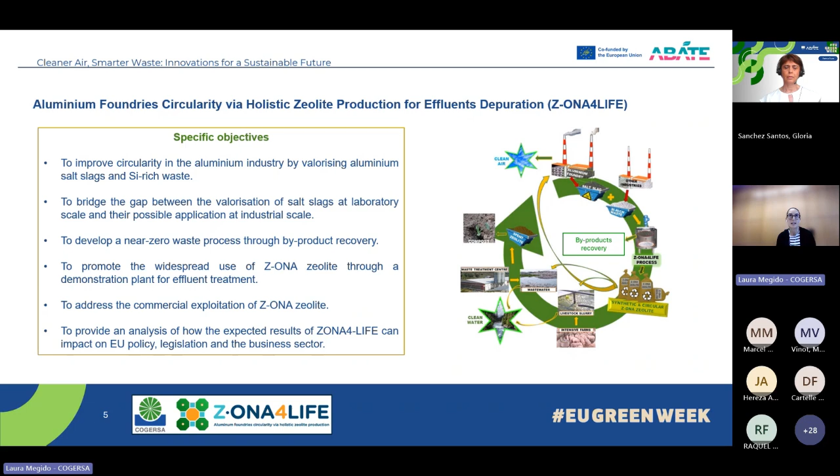So why transform salt slag into zeolites? Well, zeolites are essential inorganic materials in the chemical industry due to their porous structure and ion exchange properties, which make them highly effective in various applications.

In 2021, the global zeolite market was valued around $12 billion and is projected to reach $14 billion by 2026, a growing rate of 3% annually. The synthetic zeolite market reached $5.9 billion in 2023, driven mainly by demand from detergent and adsorbent manufacturers.

So, given this data and its relevance, we need to know more about this salt slag. It is rich in aluminum oxide, with around 40 to 50% content, which makes it a promising raw material for zeolite production. To achieve the required composition, we need to combine it with other industrial waste rich in silicon, so that we can also create industrial symbiosis between two sectors, aligning with European priorities.

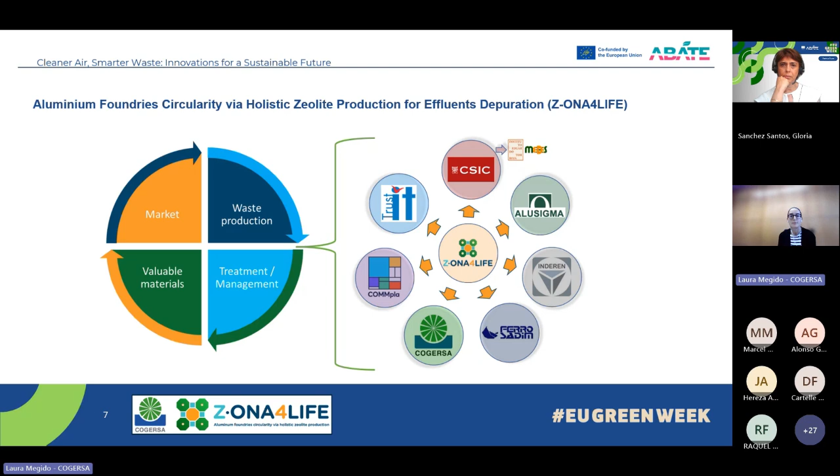Some data about COGERSA. COGERSA is a public company but belongs to a consortium, a public waste management consortium in Asturias, constituted by the regional government of Asturias and all 78 municipalities. For instance, in 2024, we managed over 872,000 tons of waste, of which 47% was municipal waste and 15% was industrial waste.

This is possible because we have an integrated center of around 4 square kilometers. Here we have many types of facilities in which we can manage all types of waste, except radioactive and explosive. We have several treatment plants, 3 landfills for non-hazardous waste, hazardous waste, and inert waste, and also an R&D area that we call the Open Lab.

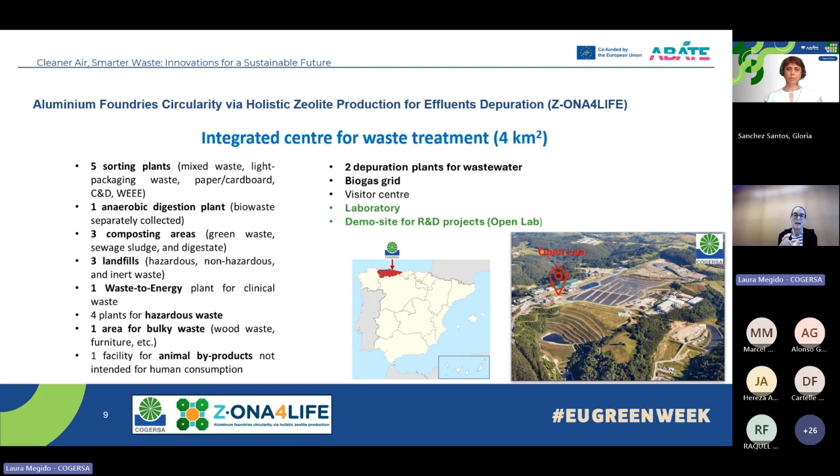In this Open Lab area, which you are seeing a photograph in the slide, we will host a pilot plant. It's a pilot adsorption treatment unit in which we will test these Z-ONA zeolites for wastewater purification. The target is the leachate generated in the non-hazardous landfill, but we can also treat other kinds of wastewater we have inside our wastewater center.

We are currently testing Z-ONA zeolites for treating ultrafiltration permeates from another LIFE project. What you see in the photograph is a pilot plant from the project LIFE Infusion. These permeates are produced after being stripped and ultrafiltrated in different equipment they have in the pilot plants. We also want to test Z-ONA zeolites for purification of gas streams.

For example, at Alusigma's aluminum ingot plant, we can control the composition of these gases before being released into the atmosphere. Although odor control was not part of Z-ONA's original focus, we've seen growing scientific interest in using zeolites for this purpose, including synthetic ones. So if there is potential for collaboration in this direction, we'd definitely be happy to keep in touch with the Abate team or others that would be interested.

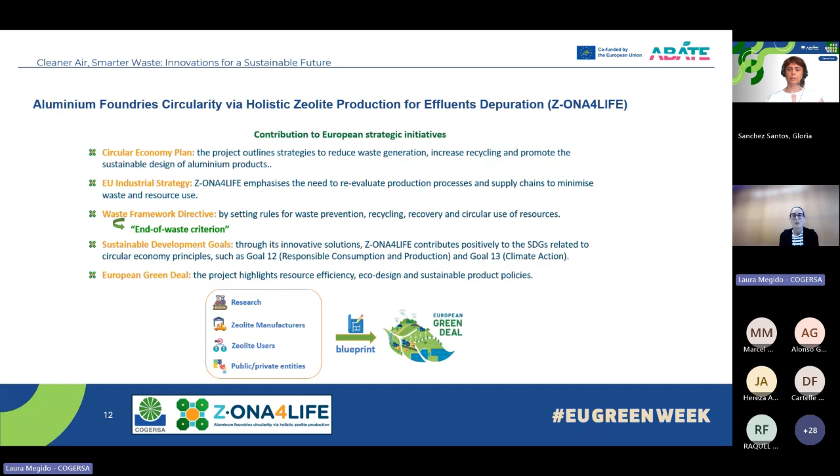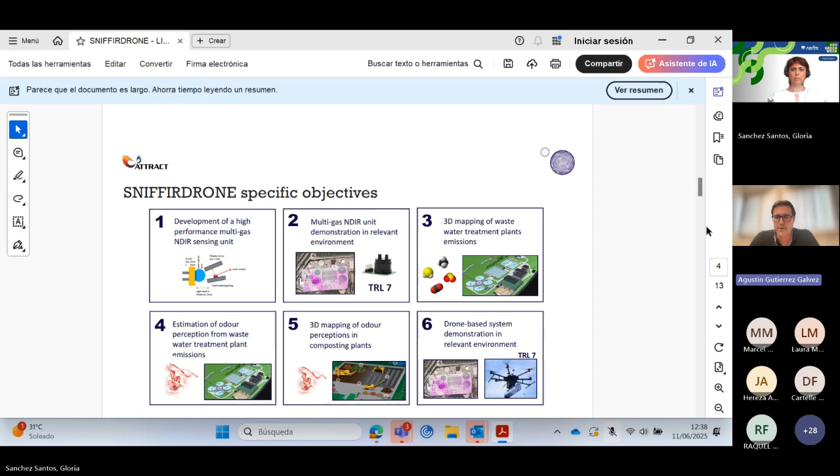We wanted to show the flexibility of this platform, not limiting ourselves to wastewater treatment plants - at the end of the project we also tested in a composting plant. Finally, the final goal, along with the goals of the call, was to bring this whole system to a mature technological level.

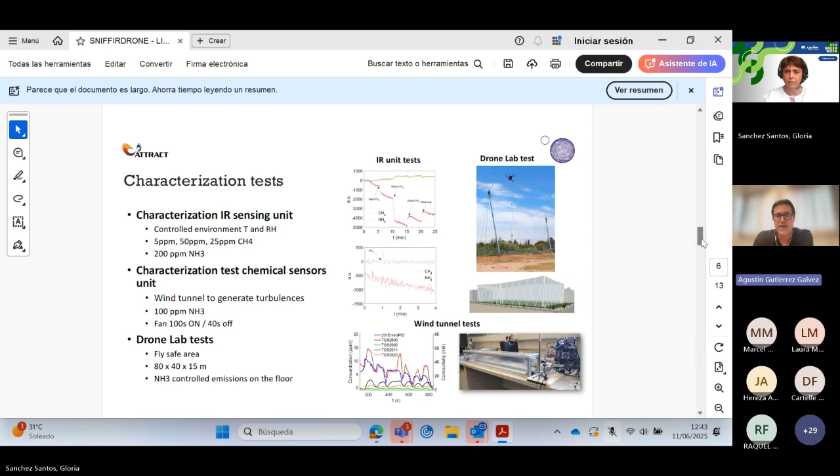Finally, before going to the plant, we wanted to test the entire system together, so we had to do flights. To do flights safely, we used the drone lab in Castelldefels, a closed area where you can fly your drone without limitation and test your system for hours. We can move to the next slide now, Gloria.

And we ended up with a total of 128 olfactometries at the end of the project, which is quite a good number.

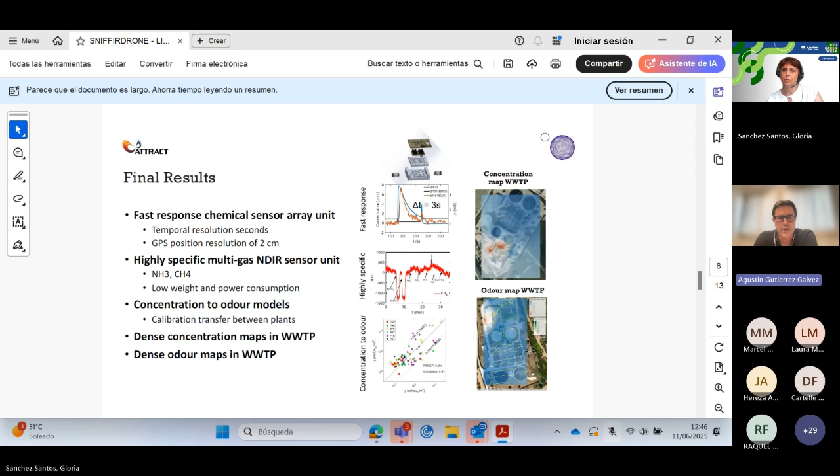On the right-hand part of the figures, we can see a concentration map of a wastewater treatment plant. In this case, a concentration map of Molina de Segura in Murcia, where we have this color-coded intensity of the odor. The upper part is concentration. At the bottom, we can see the odor map in the wastewater treatment plant of Torredembarra.

Okay, so we go to the next one. In the final slides, what I wanted to do is highlight one of the important parts of a project like this, which is the calibration model between the IOMS, the instrumental odor monitoring system, the chemical sensors, and the odor. Basically, the idea is that we built a model for each plant that we go to. So we have a model that is able to predict from the sensor responses the odor that the human panel is predicting. When I say odor, we are limiting to odor concentration, which is what we are studying here.

So we have a model that transforms sensor responses to odor concentration. An interesting aspect is to see if this model is maintained across plants, because that would be very helpful in the sense that you can just test it with one plant and then use it for the rest. What we observe is that this doesn't happen in general. We can see here 3 models on 3 different wastewater treatment plants, Molina de Segura, Torredembarra, and Pinedo, where the models are slightly different. Not only this, but the sensors used to do this prediction are also chosen to be different. So in general, we can see that this model is not maintained.

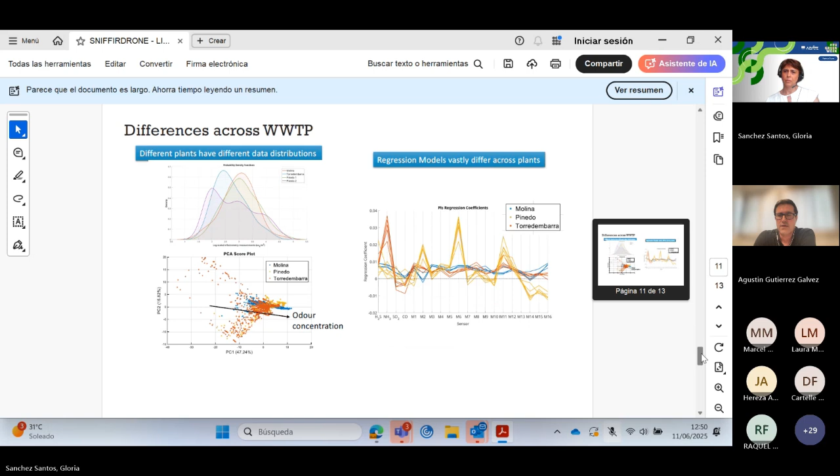So the idea here is that it would be important to try to find a way to do calibration transfer. We want to transfer the calibration that we do in one of the plants to the other plants. But this is just one of the scenarios for calibration transfer.

A different scenario that also requires recalibration is one of three scenarios we have. The first one is system drift. Whenever you calibrate on a certain plant, and certain time goes by, let's say 1 month, 2 months, your sensors have changed due to drift or other reasons, and you want to use the old model to analyze your data.

But to do that, you have to do a certain transfer calibration. So the second scenario will be what I mentioned: different plants. You calibrate in a primary plant A, and you want to use that on a secondary plant B. We have seen that we cannot do that directly, so we have to do a certain transfer from one model to the other.

And the third scenario is the scaling, which also happens to some extent when you calibrate for a certain instrument and try to use it on an instrument that is built nominally exactly the same way, but we know that chemical sensors do not respond exactly in the same way. So we have to adapt this model in order to use it on these different instruments.

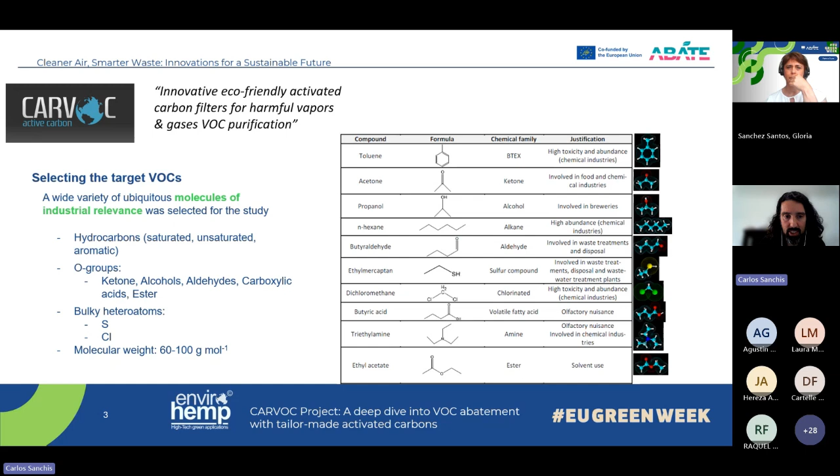The next step for us was to create the catalog of activated carbons that we wanted to test. Initially there was a catalog with around 60 different entries, like 60 different samples. We picked 4 of them, and all of them were produced by chemical activation.

Just as a side note, activated carbons, you probably know that material, but what you might not know is that, let's say, 99.9% of activated carbons typically used in the industry are produced not chemically. They are called physical activation, produced in Asia, typically out of coal or out of coconut shells. This is not really very flexible in terms of properties. It's like the standard 1,000 square meters per gram activated carbon, typically hydrophobic, so you cannot really induce a lot of properties within that material.

The 0.1%, which is chemically activated carbon, is used for just one application worldwide. The only one that wants to pay the additional cost of going for a chemically activated carbon is the automotive sector, for the control of evaporative losses of gasoline in the tank of the vehicle. The reason they go for this more advanced version of carbon is because they have constraints in terms of the volume the carbon can occupy in the vehicle. So if you tailor-made the carbon for that application, you gain adsorption capacity, and also in this particular application, they want to gain recovery of the fuel that was absorbed. So we used the same type of activation that the industry uses for producing those more advanced carbons, and we ended up selecting those 4.

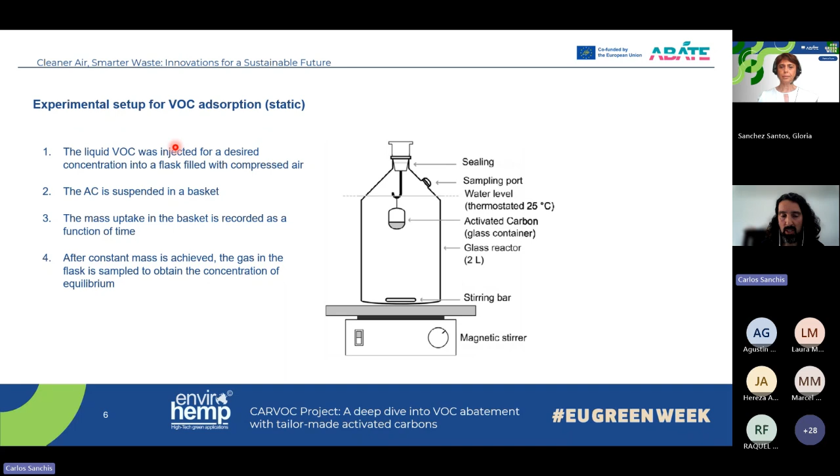So we jump now into the results of the project. First of all, we were assessing the kinetics. We found that an increase of at least 20% in the kinetic constant is considered a relevant induced property that we are inducing by modifying, probably mostly because of the surface chemistry that we are inducing in the carbon.

So we found a number of results. I want to point out that 20% is the threshold we used, but in some cases we duplicated or even tripled the value of the constant, so we can really accelerate or speed up the adsorption.

So some of the results are easy to explain. For example, polar substances like alcohols attaching quickly to very functionalized carbons, or the same one having bad kinetics at a surface which is not really very hydrophilic, because we are not inducing a lot of oxygen groups.

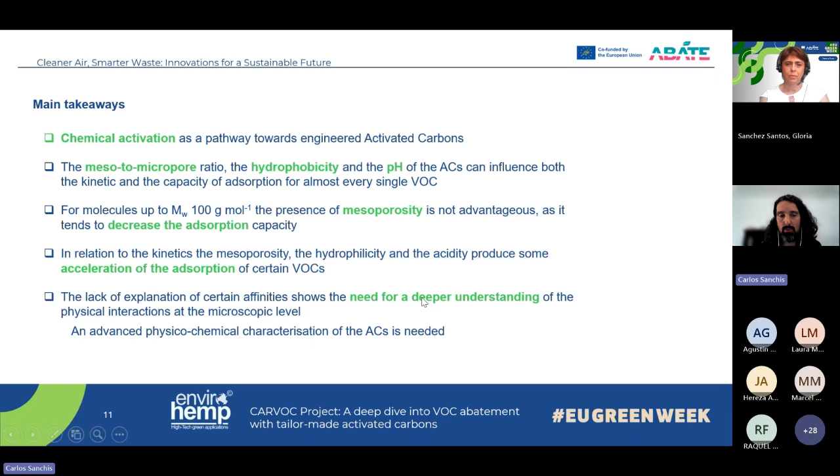Here what we were developing is a solution for the regeneration of spent activated carbon, mostly considering water treatment, but also open to gas treatment. The main goal is not the recovery of the VOC, but the recovery of the activated carbon when it is no longer in service or no longer active.